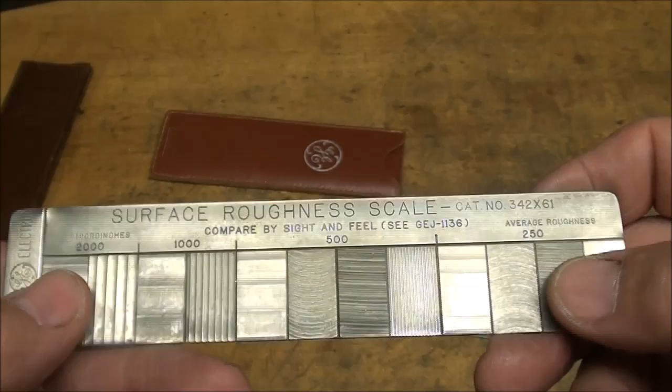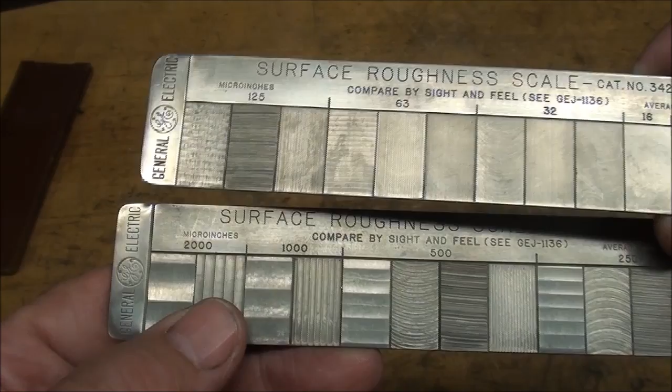Anyway, I took the masking off of these, but what we have here is a surface roughness scale or gauge. General Electric. And there's two of them. Now they still make these. I don't know if GE does, but various companies make these. I think Rubert makes one. Someone mentioned that. He called it a Rubert gauge. And some of them are made of plastic rather than metal, so they might be cheaply made so they can be kept in the drafting department.

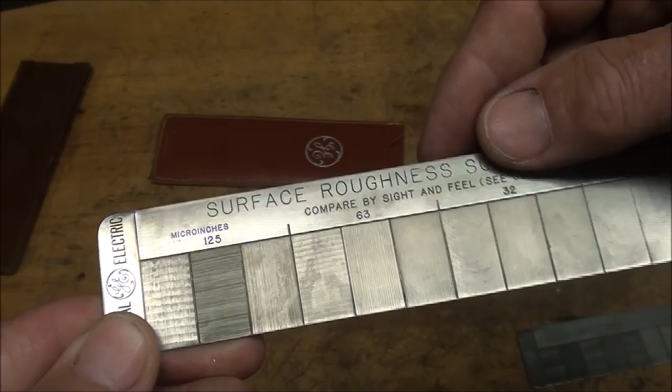And the reasons for using one of these is they're attempting to quantify the smoothness or roughness of machined surfaces, and I think they make these for castings too, a little bit different type, but this is basically for machining. And the smaller the number, the smoother it is. So number 4 here is the very smoothest. And then on this other side here, the 2000 is very coarse, and that's in micro inches.

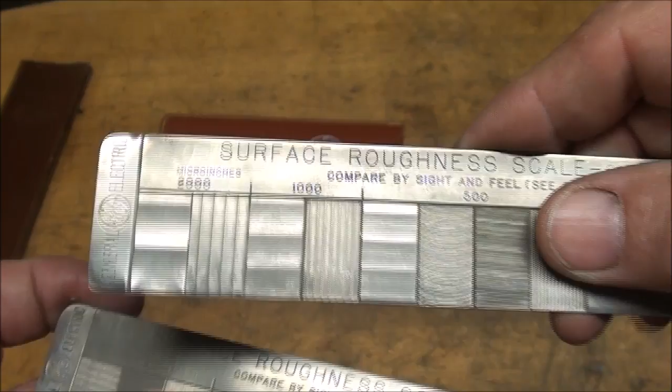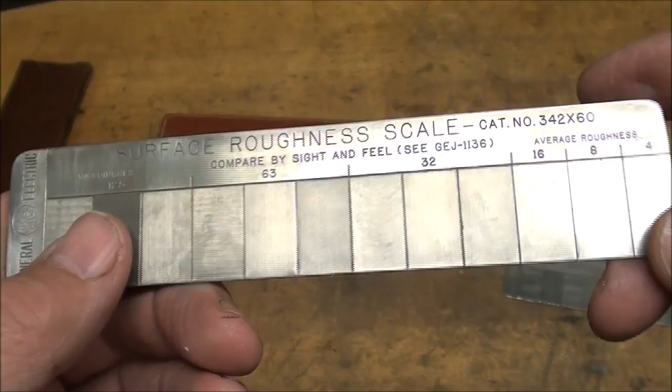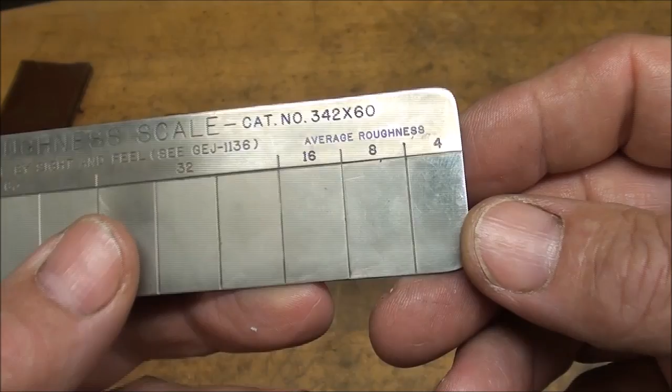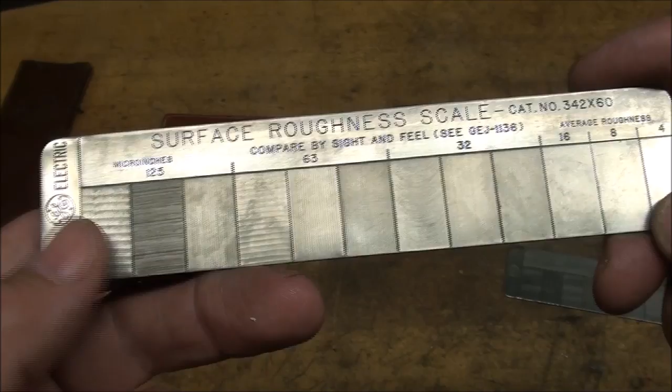And the whole idea here is for the machinist to compare one of these finishes with what he's working on, and the drawing more than likely specifies the roughness or smoothness that is desired. And it is very expensive to get those smooth surfaces, and this is the kind of surface that we needed at Caterpillar on fuel injector parts, and they used a profilometer, I guess it is, electronic instrument that has a stylus in it, and all the companies make those too, because this is pretty subjective. I can see the boss and the worker arguing about the quality of a finish.

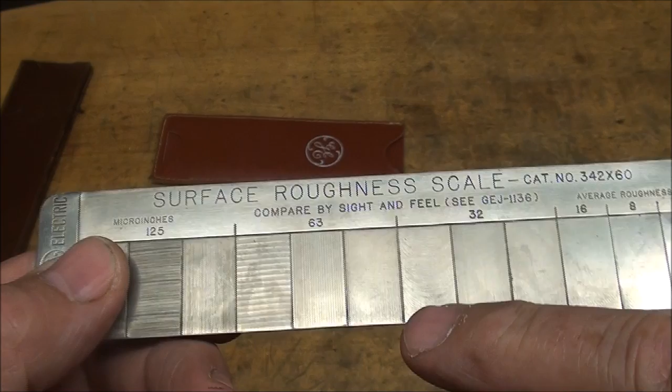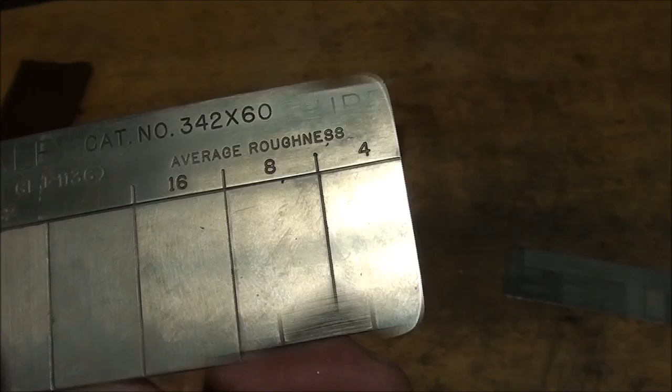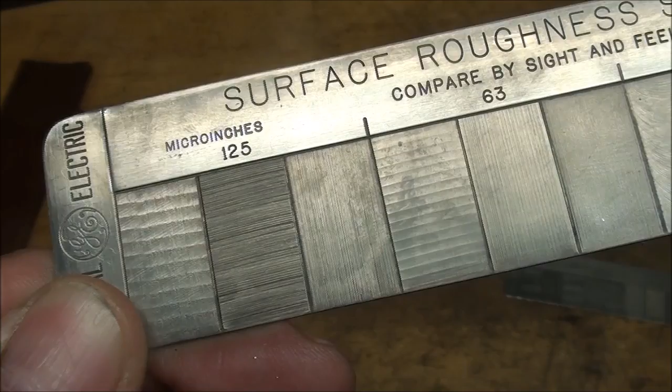And in each one here there's one for milling and one for turning and so on, so there's several different samples. A lot of reflection here, but a number 4 stands for a costly refined surface produced by honing, lapping, and buffing. So it's very expensive to get a finish like that. On the other hand, the 125 is classified as a medium commercial finish, and that's the roughness recommended for parts subject to loads, vibration, and stress.

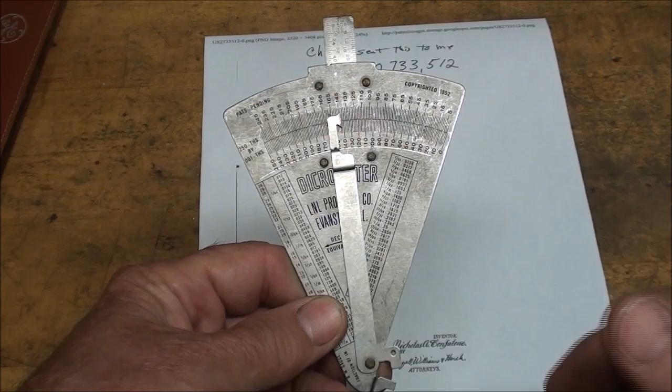Okay, that's enough on that. Surface roughness gauge. Many of you got that. Most of you got that. I was surprised how many people knew what that was. I myself did not know exactly what this was or is, other than it's called a Dicrometer, and I had accused it of being a poor man's micrometer. And in a way, it is.

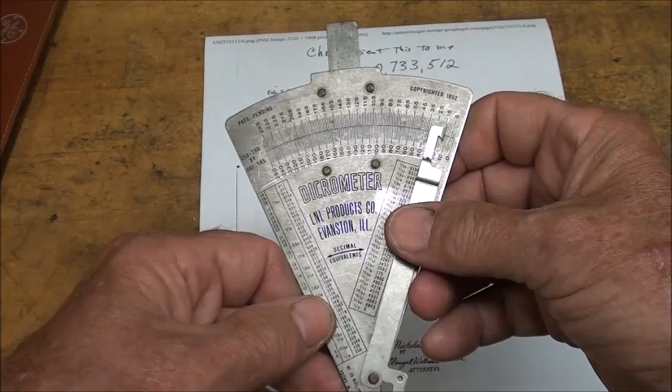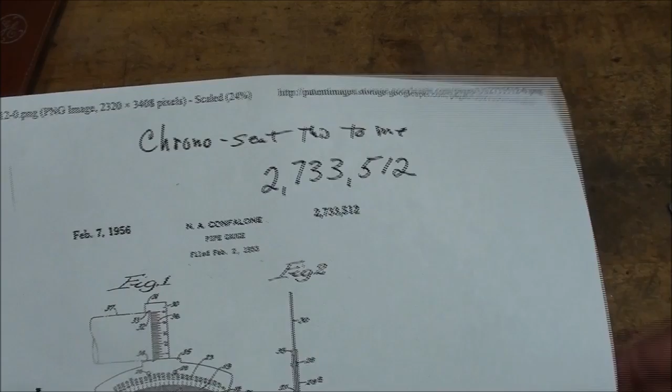But somebody right away, Chrono, sent this to me, and this is the original patent drawing from 1953. There's the patent number if you want to look it up on Google, and there it is, and it's called a pipe gauge. It's really neat how we can see these patent drawings now without going to Washington, D.C. This one was missing the ruler, so I just stuck another ruler in there, happens to fit.

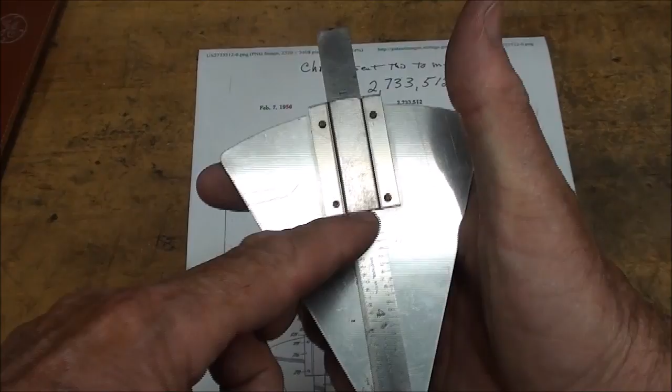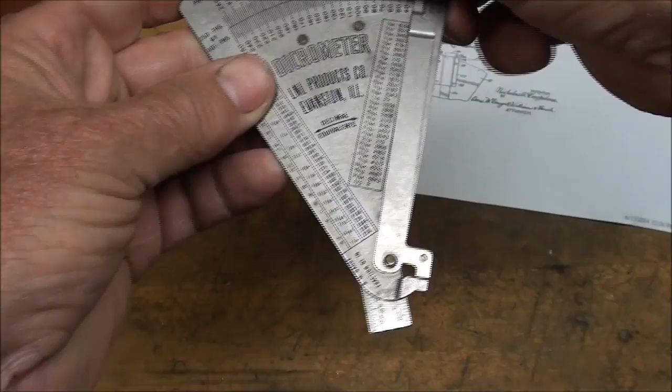And if you can see in the picture here, right here, that's a piece of pipe with the ruler, and he's measuring the diameter of it. Just like this. Not that you couldn't use a ruler by itself. And then for checking the wall thickness, we're using this. And we're reading it right here, so that's about 106 thousandths wall thickness.

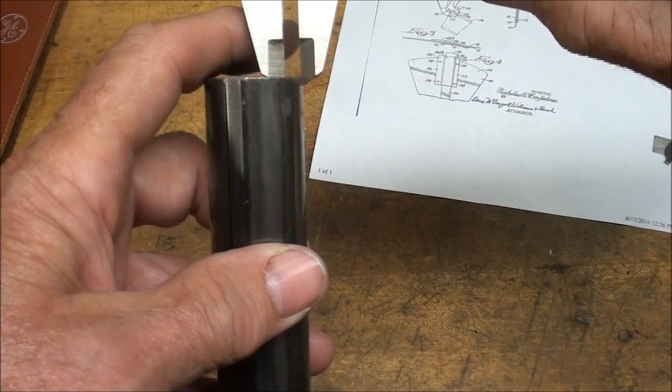Now let's see how it corresponds to this. Well, my neighbor's got a burr in there. You hear that Model T go by? I'm getting about 110 thousandths there.

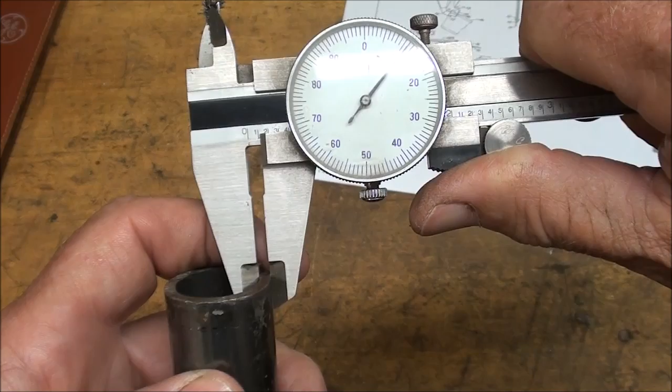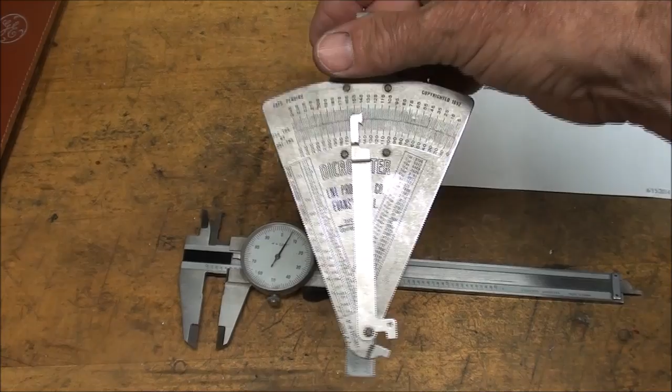Now, why would you use one of these? Well, they didn't have dial calipers back then, but they certainly had vernier calipers. But I suppose that this was just a heck of a lot cheaper than any kind of precision instrument, and maybe the workers could carry this in their pocket, although that would tangle in your pocket. That wouldn't be any good unless they had a little leather case for it. But anyway, that's what that is. It's a pipe gauge, according to the patent drawing. But I'm sure you could measure anything you wanted with it.